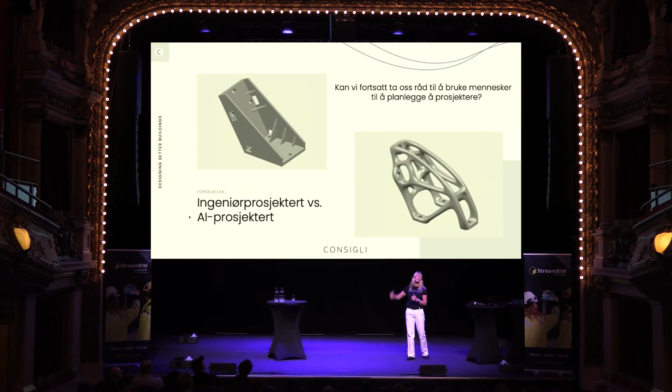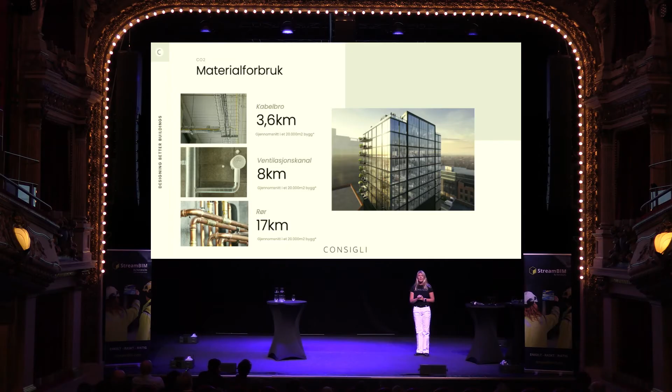We started out about 4.5 years ago to build this AI, and started with the technical systems. It's really important: the autonomous engineer, she's not an architect. Architect is a different education, different industry, but she is more or less all the engineers for that early phase at the moment. And what we started to tackle was all these different disciplines within the technical systems.

Because AI is really, really good at using statistical methods to solve high complexity. A large group of humans, each with their own software, is not particularly good at finding an optimal solution to highly complex problems. So here we have a situation where AI is just perfect for us.

Because if you go into the interdisciplinary design, I take it most of you are from the industry, so you know how complicated this is. But we do know the laws of physics. We know the capabilities of the vendors. We know the specifications. We know the code. And we also know how we normally solve stuff. So everything is known when you go in and do interdisciplinary technical design. It's just that it's extremely, extremely complex.

So instead of using deterministic methods - if-then-else, building an algorithm and then coding it, and having traditional software helping people solve this - we lean on the stochastic models, so statistics. We also lean on large language models, of course, great AI in that, but we also, when doing engineering, use deep tech AI, physical AI, mathematical AI as well. So for me, the big difference between traditional software and AI is that we go stochastic instead of deterministic. You might want to look up that later.

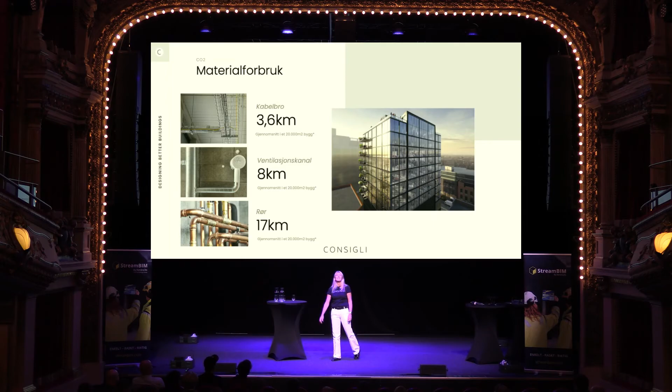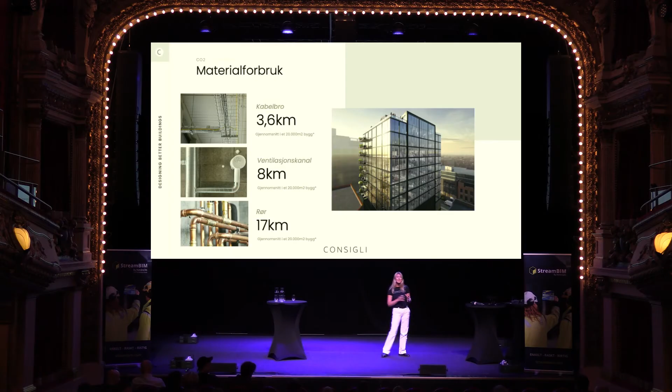So we've been struggling. I've been building - someone you might know Niras. It's the third largest Danish consultancy engineering company. I built the Norwegian arm of that and was at the global C-level. So we come from the industry, we know the struggles, discovered AI, what it was doing in media and medicine, and thought, well, this is powerful. This we can use to solve the real struggles in what we're doing. And we have targeted early phase engineering.

But it is - I don't know, back to my age again.

I was around for pen and paper. Some of you were probably around for that as well. We're part of that digitalization of the industry.

What we've done becoming digital in this industry is primarily getting more and more consultants, each with a digital tool. And then we wonder why haven't we gained any efficiency by digitizing this industry? Because we haven't, to be honest.

You look at the business model for the consultants - sorry for the consultants who are in the room - the business model is to spend as many hours as possible because you either charge by the hour or by the scope. So why would you spend less hours? Why would you take down the scope?

And looking at Autodesk and the likes, their licensing model is to sell to each one of the consultants or each one of the engineers. So why would they make tools that brought efficiency into this? You need more, not less users, when they charge you per user. And then I think everybody can do the math and see why we haven't gained any efficiency in digitizing. Sorry, it is about the money.

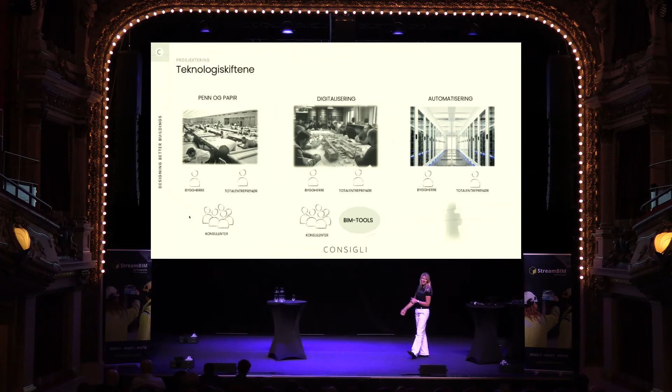That's why we don't sell our licenses to engineers, to the consultants. We sell directly to you, developers and general contractors.

And here she is. She's been trained by the best people in the world.

We started out and sourced people from absolutely all over the world, people with PhDs in all those narrow fields of AI, because we needed that to be able to build these capabilities. We also have trained her on all information that is needed to become a good engineer, or needed to become all the engineers working globally.

But machines can train on that massive data. She also has way more experience than any human engineer can have by now.

We started in Norway, we built it there, scaled to UK, tried to get into Sweden, but it was really, really hard to get a C-level group in Sweden to all agree on going full AI about a year or two ago. Might have changed now. Hopefully it will be changing. We're into US, into Asia. We have some clients together with Rendra in Asia as well, and work closely with the Sweden people.

And I want to show you a little bit how you now can have AI together with your StreamBIM solution. Because we don't hold the data, we don't sort the data, we don't keep control of the data like StreamBIM do. But the engineers, our autonomous engineer, love to work together on the StreamBIM platform, as we've seen today, so you do as well.

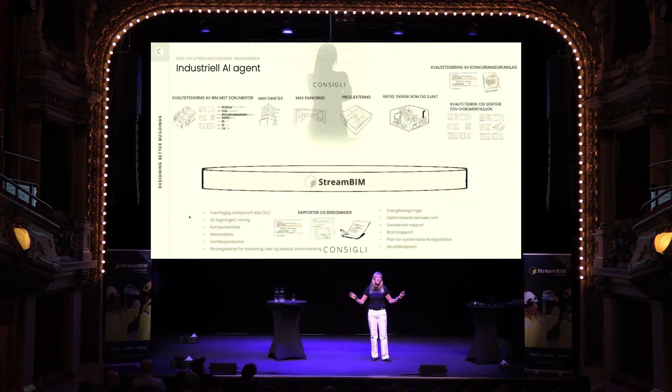there is a lot human engineers cannot do, and we've seen the result of what human engineers do, because we were checking tender documentation for years with our AI, and we see there's a lot of rubbish being sent out for tendering when humans do it.

She is better already, way better already, I'm sorry to say. But happy to show you.

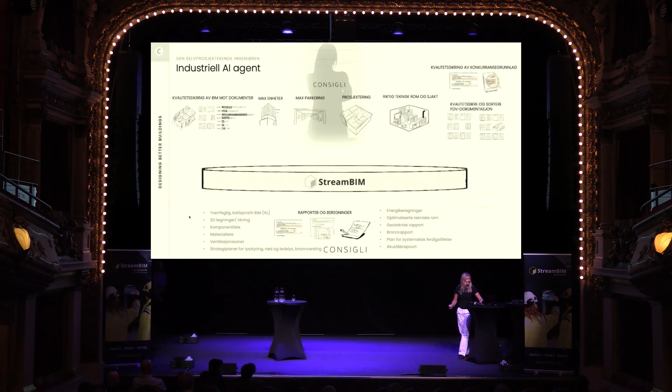She would take the model, the specific written specification and documentation, and simply show you where the discrepancies are. We have schools in Norway where the library has been modeled twice as big as it says in the area schedules. That's a problem, because you need to go back and update either the area schedules or the model. Everybody needs a feeling for what can we afford, and what that kind of discrepancy costs when you go to tender and get a contractor in, and there's deviation between these sources of information. You all who've been in real projects know how that ends.

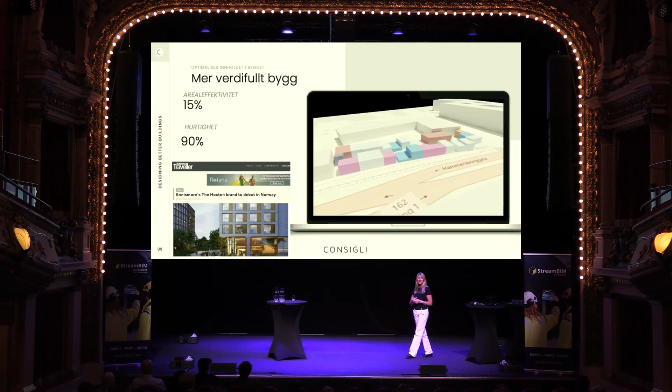Shuffling around hotels. This is a small building in Oslo. It's going to be torn down and be the first Hoxton Hotel in Oslo. We did find 24 more rooms for the developer here, the equivalent of 70 million Norwegian kroners extra value for the building. That developer is now the largest external investor in our company.

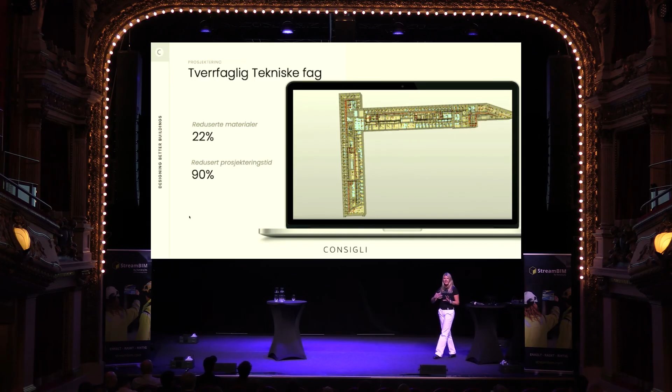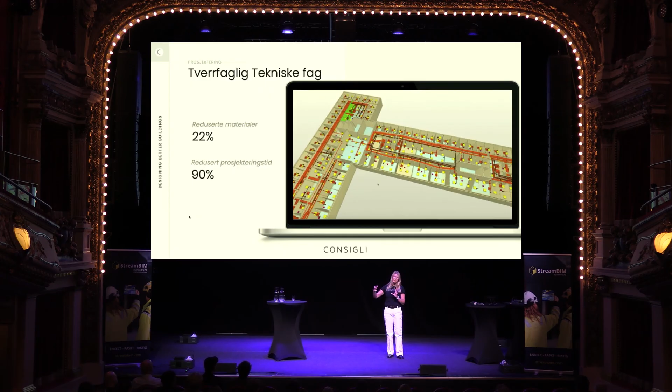If we get the architect model in, it takes us about 2 days. Most of that time is parsing the architectural model where they've used floors to make ceilings and walls — it's not modeled correctly, but we can handle that because we come from the industry, so we don't expect something perfect as input.

We handle imperfect input. We're also now, for the first projects, taking in 2D drawings, and we just generate the full BIM so that in 2 days we can give you the full technical systems ready modeled, all disciplines, shortest route with ducts, pipes and cable trays, all the components in the ceiling optimized and placed. So you have the sprinkler covering what you need.

You have the lux level on all the desks that is required. We also do the load calculation, so you can go in and see what kind of loads she's using as her basis for all the spaces in the building.

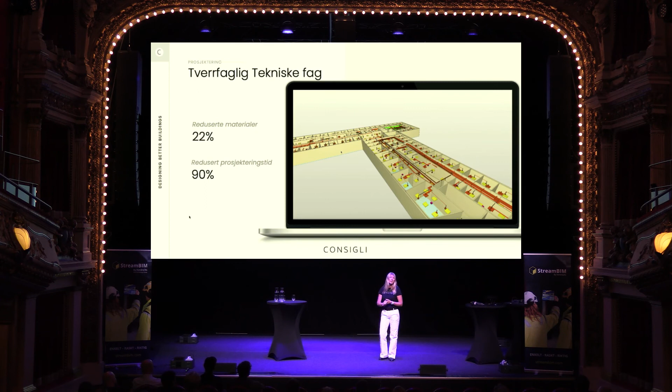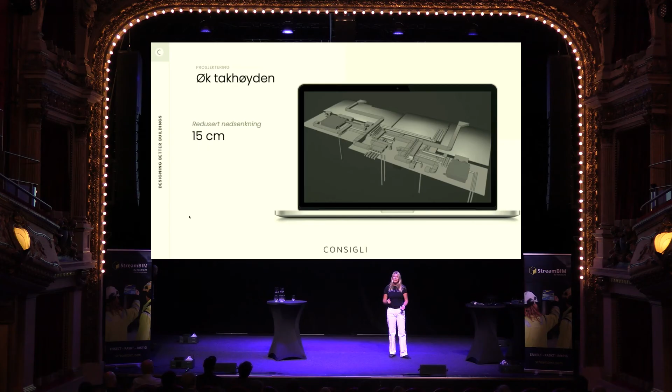Those voids in the ceiling — we have tall residential towers where we take all the ceilings up. In this project, we took it up 15 centimeters, but we've also gone higher. That is a lot of value for the developer, to be able to sell apartments that have 15 centimeters higher ceilings. That is real money. I should have had some business people here.

For the documentation you need for tender documentation, we just generate it. We don't go into detailed design. We do optimize plant rooms at later stages, but we don't go into detailed design yet, because we can't get liability insurance for when AI is doing the engineering — the insurance industry needs to develop further when it comes to AI. That's why we stay out of detailed design. There's still some food out there for you consultants.

But we do give you a better foundation to start on: interdisciplinary coordinated, no clashes, shortest route with all the pipes, ducts and cable trays, optimized placement of all the components, optimized shaft sizing, optimized plant room sizing.

We're just picking all these values while using what AI is really, really good at, and it fits our industry perfectly. For all of you already working on the StreamBIM platform from Rendra, you can get it as an addition to your license.

It's really easy — it's not scary AI. When she finds something, when she checks the tender documentation for risk, for example, she will simply say: here you've written something in one document, and in another document it states not necessarily exactly the same. You might want to have a look at it. She shows you the documents, highlights where the problem is and what the problem is. So, not scary AI for this part.